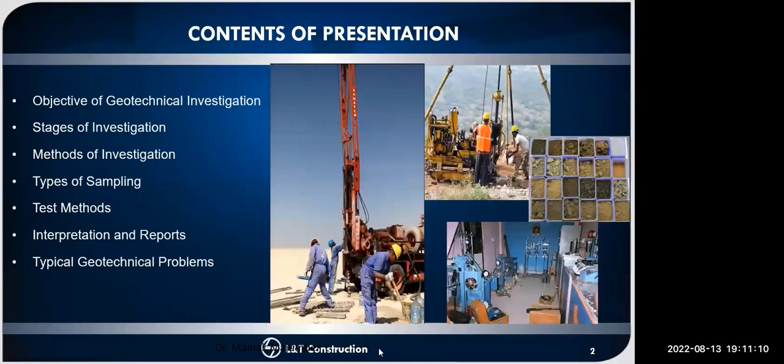I hope my screen is visible. Can anybody give me confirmation whether my screen is visible or not? It's visible, sir. Okay, are the slides moving? No, sir. Now? No. Now it is? Yeah, is it moving? Yes, sir. Okay, thank you.

So the objectives of basic geotechnical investigations and different stages of this investigation: method of investigations, types of sampling, test methods, interpretation and reports, and typical geotechnical problems.

These are most of the challenges we will face when we go for bridge construction initially. As a geotechnical engineer, you need to have some idea before going for the geotechnical investigation. We will discuss these major aspects today, the importance of these challenges, the different critical aspects, and what we need to think about before starting the investigation.

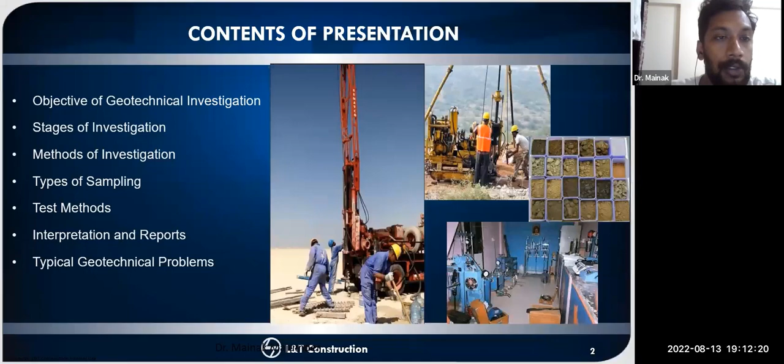That tilt of this tower - it's a very iconic tower, and there has been a lot of investigation on this tower, because this was the ideal case of poor geotechnical investigation, the initial geotechnical investigation. I hope all of you who have read about the historical importance of geotechnical investigation have gone through this Leaning Tower of Pisa case study.

Basically, the first part of this investigation process is to ensure safety. As a designer or geotech engineer, our main job is to provide safety, safe construction, as well as economical construction. So safety and economy - these two are very important.

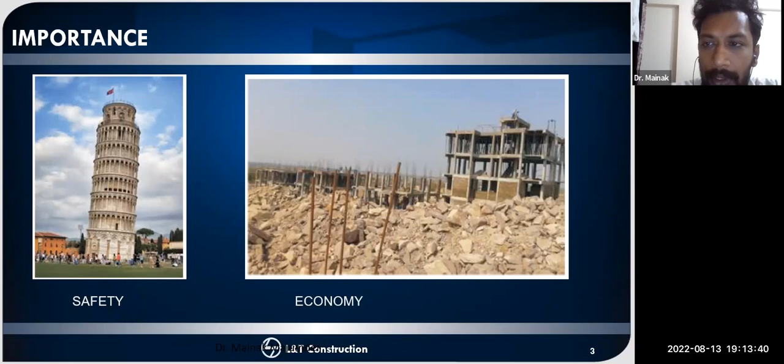For one geotechnical investigation report, suppose for one borehole, we need to go at least 25 to 30 meters deep, either SPT or CPT, then find out the different layer-by-layer properties. These things are also quite costly, so we need to be very wise about selecting boreholes and think about the soil properties along the layers, along the depth of the soil.

So the different objectives can be classified as suitability, design, and existing works - this is another important aspect.

Of course, if there is no construction or other structures present, we generally call it a green field. But if other structures are present, we need to consider the existing work, existing structural aspects, and any interaction effects or effects of changes, and the choice of the site - basically site location where geology and geography are also involved. So it's a very challenging part to select the site, and the methodology of course will also involve the economy as well as time saving.

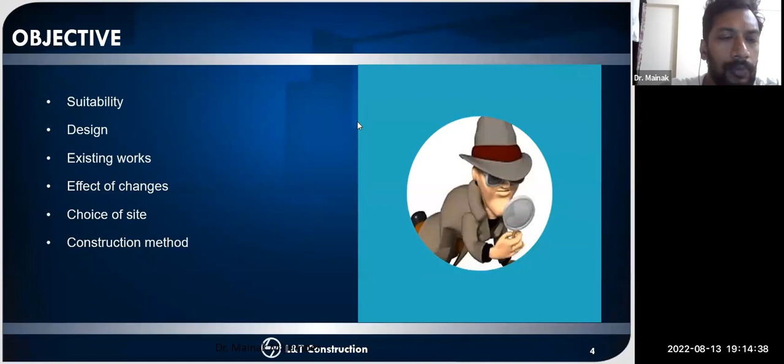Different stages of investigation, like the initial preliminary investigation, which we call the reconnaissance, is an important and interesting part for the surveyor. The whole surveying study involves the desk study and the site reconnaissance.

Initial preliminary investigation uses site data and past data. Many times we check Google Earth data to see what types of soil stratum are present, the location of the water table, soil types and conditions, and whether the area has heavy rainfall or is very dry. Those parts are stage 1.

Stage 2 is the detailed investigation for the design, where we need to design either by manual calculation or using software, inputting certain parameters. Stage 3 will be the construction review.

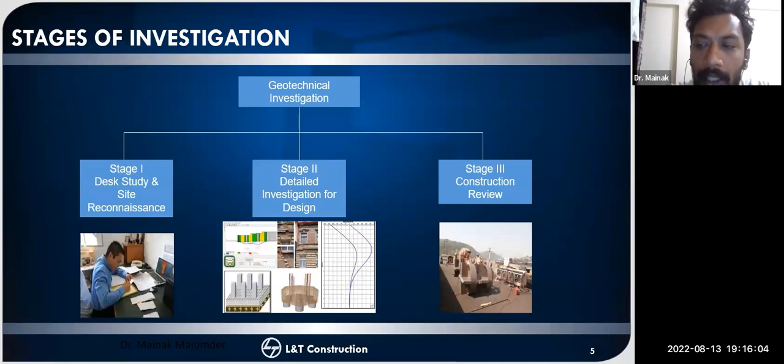Another component here is plants and machinery. Based on this investigation, we consider the different plants and machinery involved for this construction, as part of the overall construction review.

So first stage: the desk study and the reconnaissance, as I mentioned, involves maps and survey plans. It's important to understand current maps and location, the geographical and topographical stratum, rainfall parameters like annual rainfall data, and groundwater table information. Those things are important from the survey plans.

Permitted use, regulation and permission is one important aspect. If bridges are happening through congested places or urban areas, there must be underground constructions or underground utility lines, called underground utility services. We need to find out whether it's permissible or whether we need permission from the respective authority. Another is approach and access.

Approach roads or access roads are very important because we need to provide construction for the construction activities and mobilization of machineries. We should provide that approach and access road, otherwise it will cause time delays from an operational point of view. We need to think about that part.

Next is ground conditions, which is very important from photographs and images. Nowadays there's a lot of advancement, like use of drone survey and LiDAR survey, to get more photographs and more detailed three-dimensional information about the site location, including underground structures and utilities.

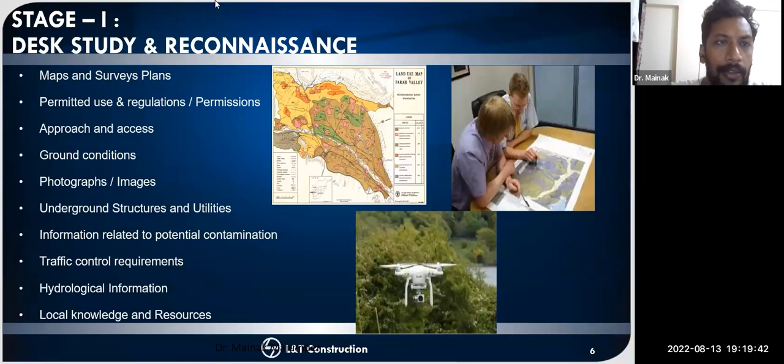Next, what is the outcome of stage 1? As I mentioned, there are 3 stages. The first stage is to find the location and extent, like the depth of investigation or spacing of investigation. Location and depth of boreholes are decided based on expected subsurface conditions, previous geotechnical information available, the likely extent of zones in ground influenced by loading, the need to achieve a reliable geotechnical model analysis, the size and importance of the structure, and tender and contractual requirements.

Each of these points has different importance — for example, tender and contractual requirements. Suppose from the contractor side, some clients gave certain criteria, such as that access roads or construction roads need to be delivered in terms of some maintenance gallery, or from an urbanization point of view, we need to plant more trees.

Nowadays it's mandatory that from each construction site, we need to plant more trees to reduce the carbon dioxide emission. For example, size and importance of the structure—what are the structures, like box culvert, pier, abutment—and what will be the size? These things come as the outcome of the desk study and the reconnaissance survey.

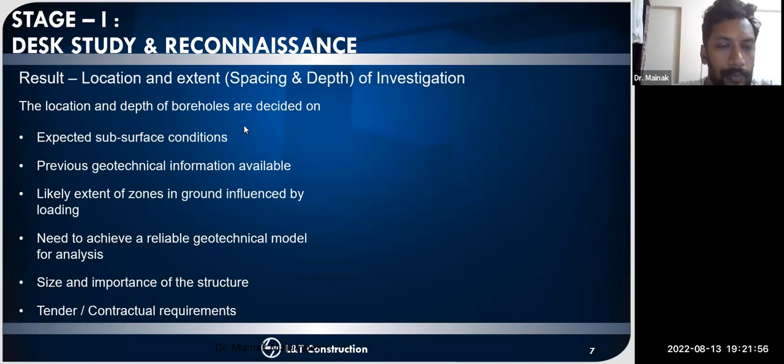From that point of view, you can understand that this depth of exploration is a very important part. One will be the cutting depths, like how we are going to cut, available machinery, and the depth we are going for the construction, that is excavation.

Second is the contaminated ground. This is very important. Suppose in some patches organic soils are present, some peat or organic soil, or more chlorinated or sulfate-prone soil, sulfate attack prone soil present, then we need to consider that contamination effect also. Size and importance of the structures, extent of influence, foundation type, embankment heights, expected subsurface conditions—all these aspects we need to consider before going for the depth of exploration.

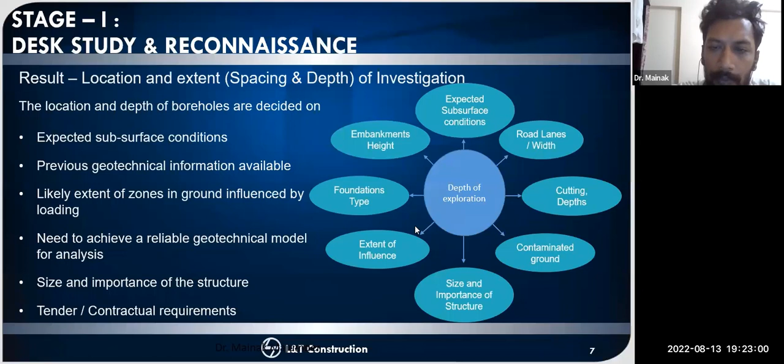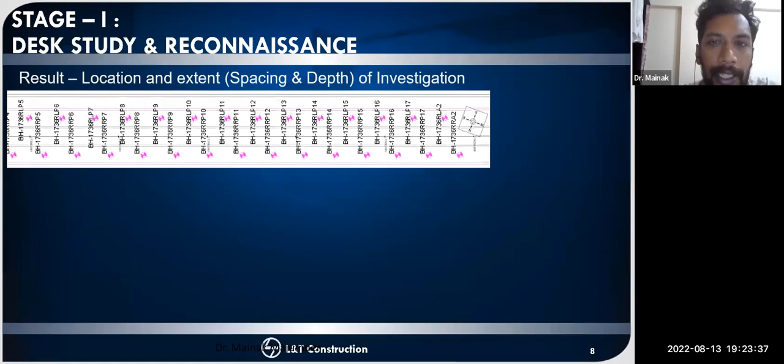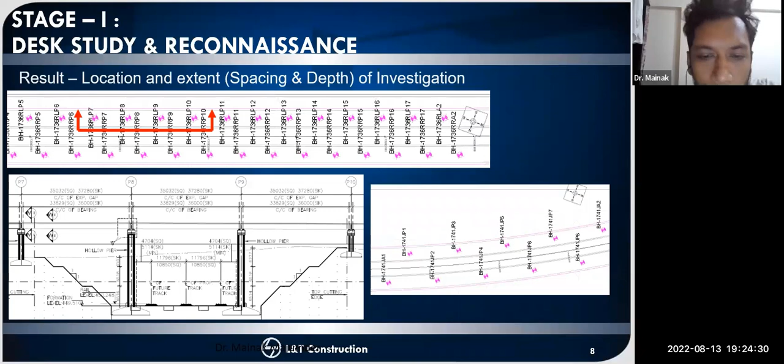These are the different aspects of borehole location and borehole spacing. So spacing and depth of investigation is very important to find out from stage one of the investigation. For depth of investigation and exploration, there are some thumb rules or guidelines.

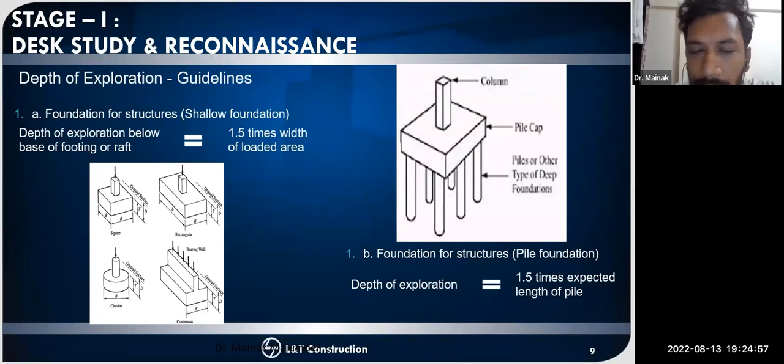For example, for a shallow foundation or structure, depth of exploration below the base of the footing or raft is equal to 1.5 times the width of the loaded area. This is very common. And for a structure like pile foundation or deep foundation, we consider 1.5 times the expected length of the pile. For example, if the length is 25 meters, we need to consider exploration up to about 40 meters, since that will be the influence zone or loaded region.

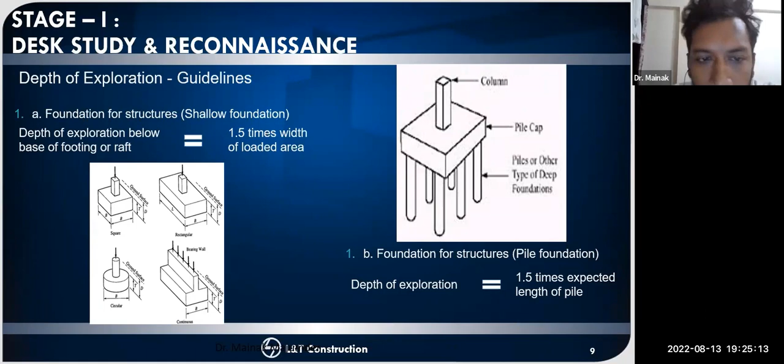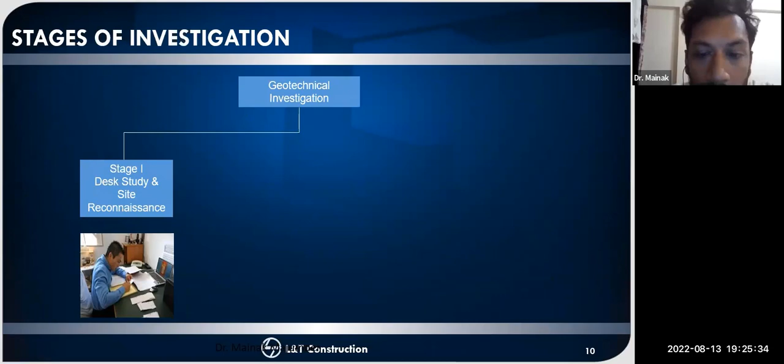So that is stage one—I hope all of you understand stage one and its different aspects. It needs to be done very carefully, considering all the above mentioned things. You can note down what are the important aspects and thumb rules of this desk study and site reconnaissance.

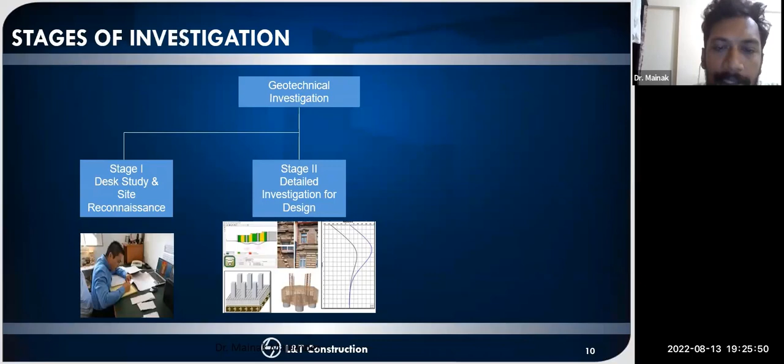Stage two is the detailed investigation for the design. From stage two, we'll get the information about the input parameters for the design and analysis. So what are the different methods to carry out ground investigation?

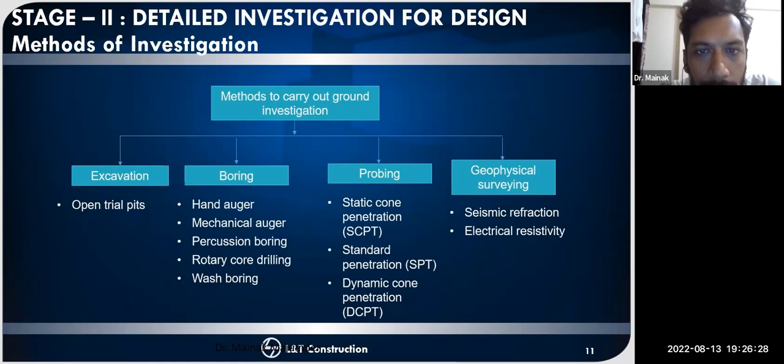One is excavation, meaning open trial pits. Second is boring—there may be different kinds of boring, like hand auger, mechanical auger, percussion boring, rotary or core bore drilling, wash boring. Third is probing—static cone penetration (SCPT), standard penetration (SPT), dynamic cone penetration (DCPT), and geophysical surveying, like seismic refraction and electrical resistivity. So these are the different ways to carry out ground investigation.

So excavation, like I mentioned, open trial pit. It's like standard dimension of the open trial pit, and pits are dug by hand or by excavating equipment, by hammering. So disturbed or undisturbed samples can be taken out from the pits. Pits are basically used, in technical terms, to find out the representative sample.

To find out the representative sample, pits are very easy to find out the representative samples from the pit. And these are a kind of sampling. So from this point of view, we will get the sample of the standard dimension, which may be disturbed or undisturbed.

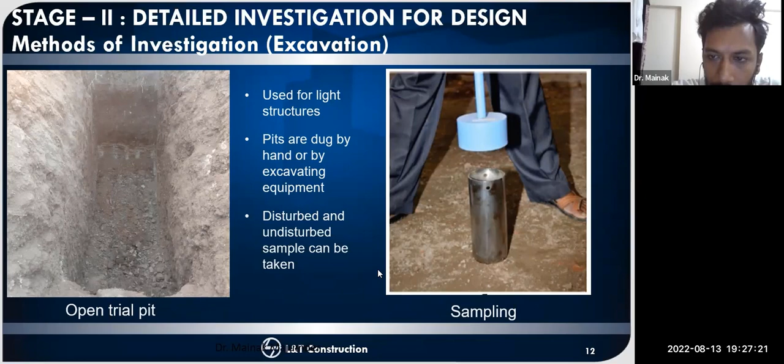So hydraulic rotary drilling rig - these are different equipment. So coming to that, investigation is not only about proposing depth or proposing spacing. We need to think about the instrumentation and plants and machinery, which we call in short P&M.

So hydraulic rotary drilling rig is used to do boring by cutting action of a rotating bit. Here we have high torque and less vibration. Second one is the calyx rotary drilling rig, boring by cutting action of rotating bit, easy to shift. The third one is percussion boring, breaking of the ground by repetitive blows from a bit or chisel.

This is especially advantageous when we encounter boulders or gravelly strata, breaking the ground by repeated hammering action. The hammer energy can be controlled from the free fall height of the loaded hammer. So these are different methods of investigation for boring.

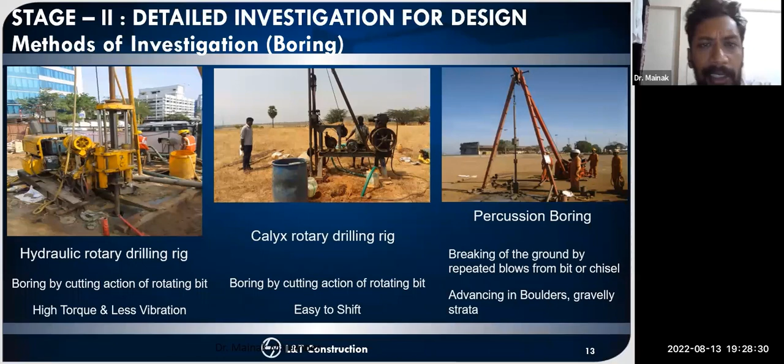And probing, as I mentioned, is very commonly used - the standard penetration test. I hope all of you are familiar with this standard penetration test specification, which uses the split spoon sampler. A 750 millimeter guiding rod falls down, with a 63.5 kg donut hammer, manila rope, tripod, ladder, and pulleys - all different components of the SPT.

So why are SPTs commonly chosen? Because it has low cost, no instrumentation involved, availability of various correlations, and both representative disturbed and undisturbed samples can be collected.

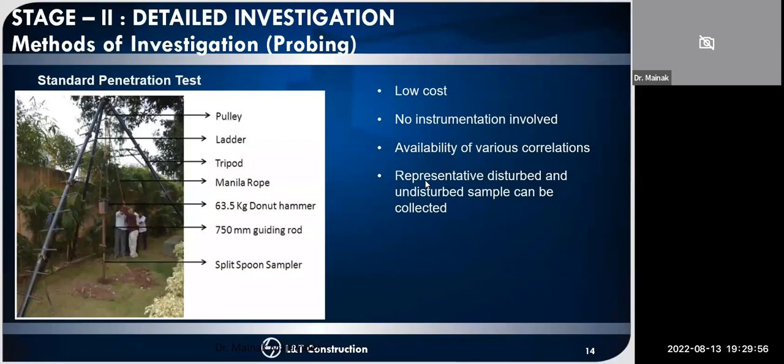So after probing, as a result of the standard penetration test, we get correlations for different parameters based on the number of blows given to the sample. It's generally well established that very soft soil has 0 to 2 blows, soft soil has 3 to 4, and hard soil means above 32 blows.

For clay, as for sand based on relative density - if it is very dense sand, it will be more than 50 blows, and if it is dense, 31 to 50 blows. So the number of blows will give you some idea about what type of soil is present under the ground.

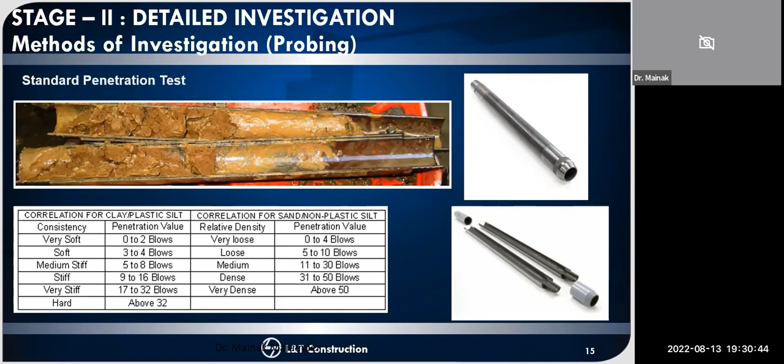So the standard penetration test - this is the basic philosophy of the standard penetration test, a kind of free fall, considering half MV squared equals... V equals the square root of 2GH. So basically we are converting the weight of the hammer times the height of free fall.

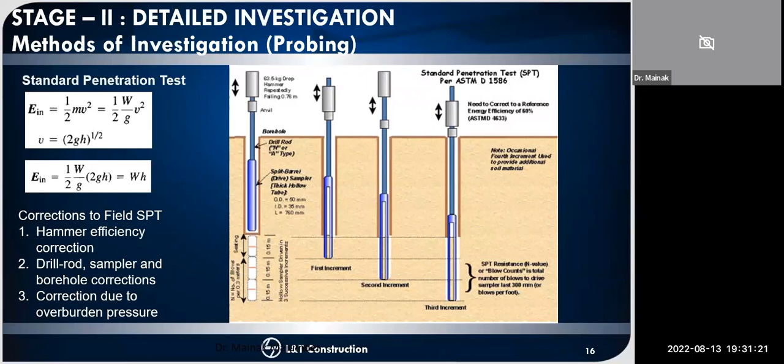So corrections to field SPT - we need to know very carefully the different corrections for the SPT. These include hammer efficiency correction, drill rod and sampler correction, borehole correction, correction due to overburden pressure, and correction due to water table.

Those are very important to know as a technical skill to find better correlation based parameters. So from the standard penetration test or number of blows, we can estimate the available bearing capacity, available safe bearing capacity, and test based correlations will give values about C and phi, and density. This will be input into the design tool you are using, and those input parameters will be found from this detailed investigation report, or stage 2.

So SCPT, or static cone penetration test - these are very important.

Determine the in situ penetrative resistance of clay. For clay, it is very commonly adopted because of the sticky nature. Sometimes the standard penetration test is not suitable. So basically, the cone is pushed into the ground at the rate of 10 to 20 millimeter per second, but it's not suitable for dense sand.

There can be pore water pressure measurement. Suppose there is some fine sand or loose sand as well as soft clay present, there may be high chances of liquefaction, so we need to measure the pore water pressure. So a piezo cone or piezoelectric device can be added, which will ultimately give you the SCPT and pore water pressure. So this is one of the versatile tests.

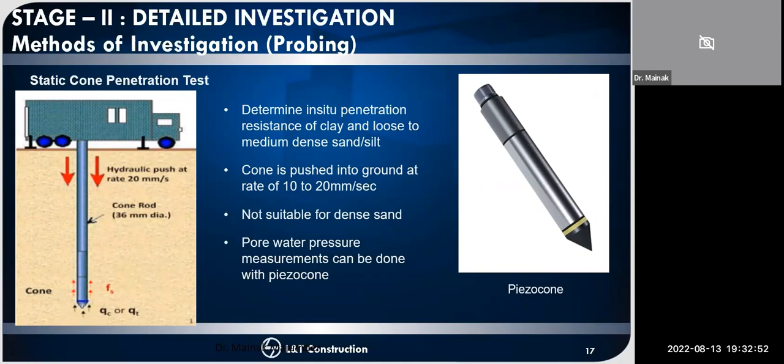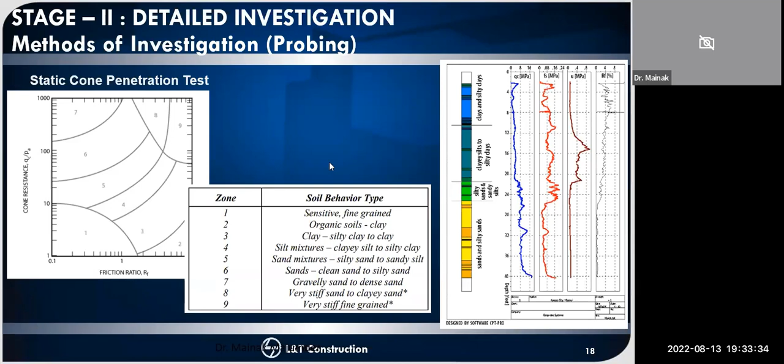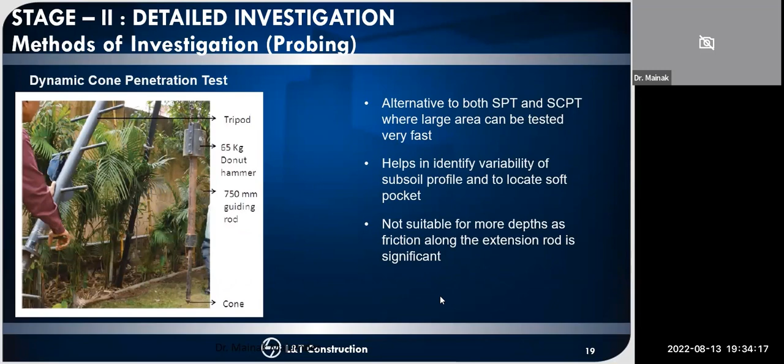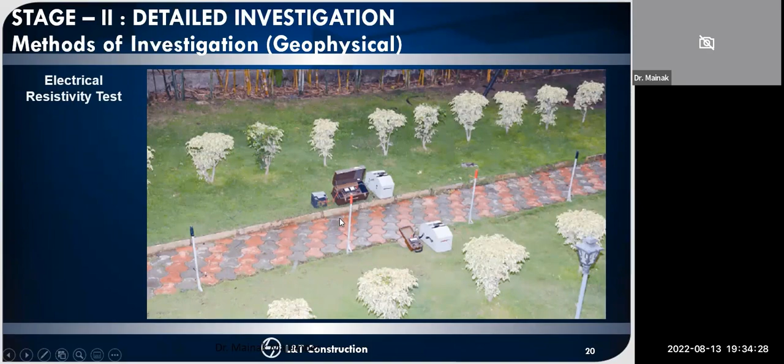Another thing is about the geophysical test, or electrical resistivity test. We are ultimately finding that each type of soil has a different resistivity. Based on the potentiometer, battery, and milliammeter, we try to find out the resistivity of the soil. The mean resistivity comes in terms of ohm-centimeter.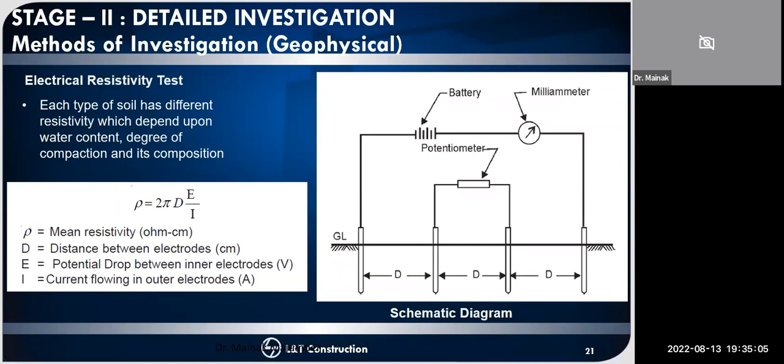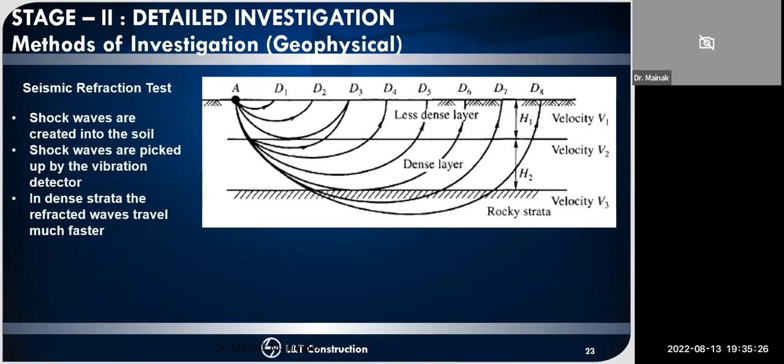Seismic refraction test is another geophysical test. In this test, shock waves are created into the soil and picked up by a vibration detector. In dense strata, the refracted waves travel much faster, and based on that we get the refraction index value. So this gives us some idea about the geophysical test.

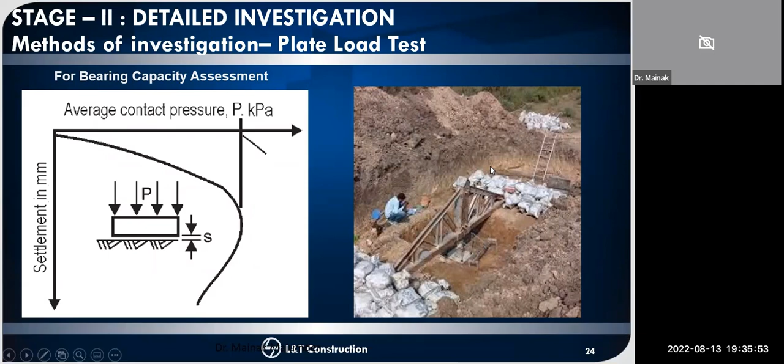Plate load test is another test for bearing capacity assessment. Initial bearing capacity assessment is done using the plate load test. The average contact pressure and settlement curve will give you the idea about the bearing capacity. This is a very important test, as in many cases like foundation design, we need to do bearing capacity assessment from the plate load test.

Now coming to the types of samples. As I mentioned, there are disturbed and undisturbed samples. In disturbed samples, moisture is not retained since it is already disturbed from its in situ stage. For more accurate data, we need undisturbed samples, since in situ stress conditions are preserved in the undisturbed samples.

Core samples and block samples are also important, and it's important to find out the different importance of block or core samples. Core samples are important to find larger depth variation and different variation of properties.

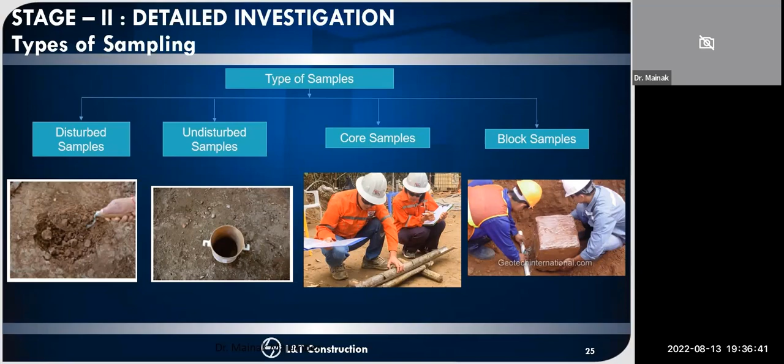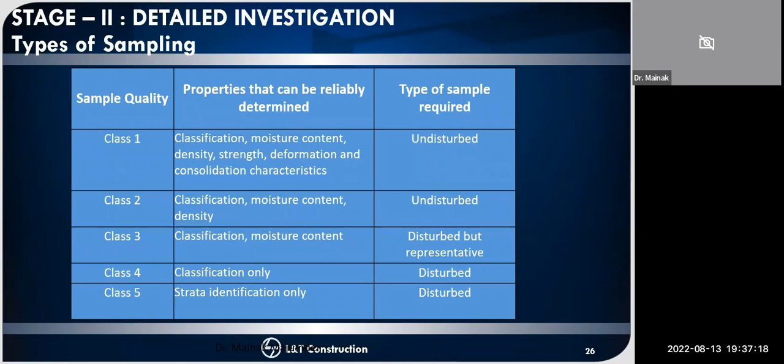For types of sampling, properties that can be reliably determined are considered Class 1, such as classification, moisture content, density, strength, deformation, and consolidation characteristics, where undisturbed samples are preferred. Class 2 is classification, moisture content, density, where undisturbed samples are preferred. Class 4 is only classification, using disturbed samples. So a disturbed sample will only give you classification and strata identification, but if we need to find the swelling index or consolidation parameters, we need to use undisturbed samples.

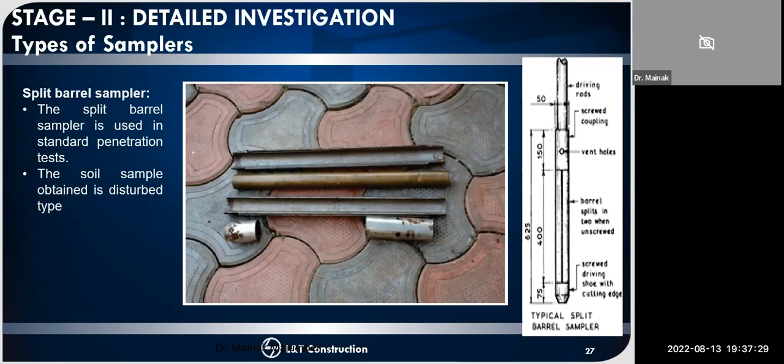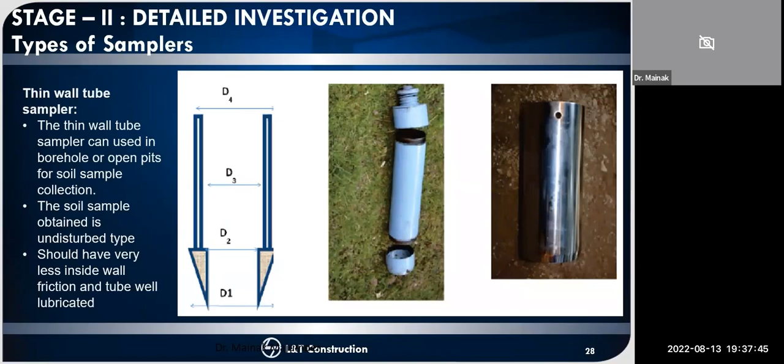Types of samplers: split barrel samplers are very common for the SPT test, and the soil sample obtained is very disturbed type. Tube samplers, like thin wall tube samplers, give you undisturbed type samples, and should have very less inside wall friction with the tube well lubricated.

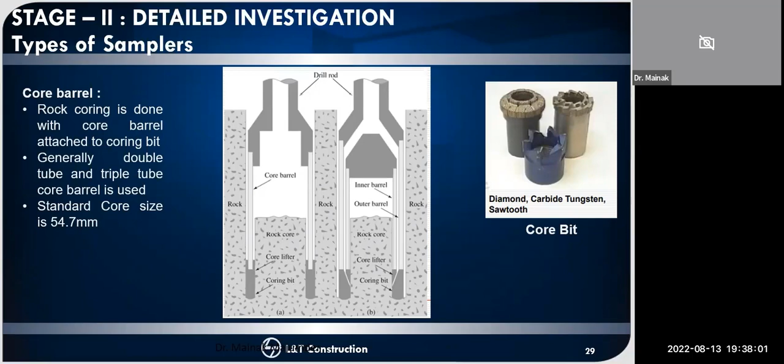Core barrel: rock coring is done with a core barrel attached to a coring bit, generally a double tube, and triple tube core barrel is used, with standard core size of 54.7 millimeter. So this is the core barrel, like the triple core barrel assembly and overshot, the whole core barrel assembly. Triple tube core barrel is good for obtaining core samples.

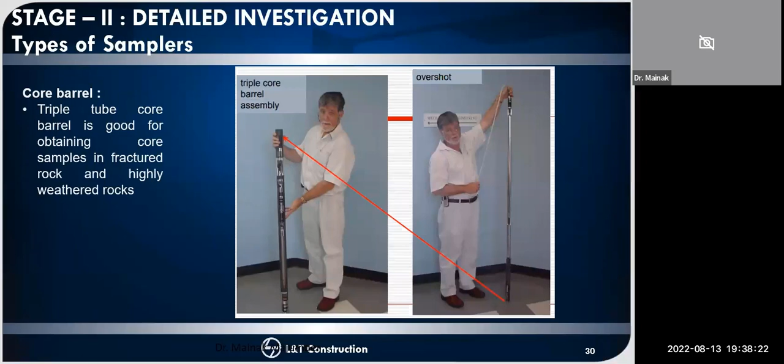In fractured rock and highly weathered rocks, these undisturbed samples, core box and core samples are very important to identify about this core barrel.

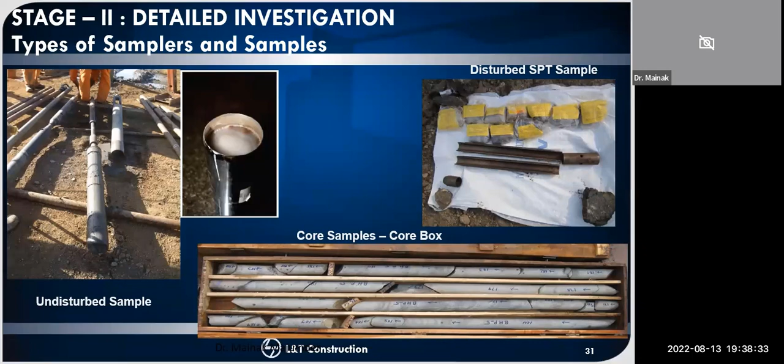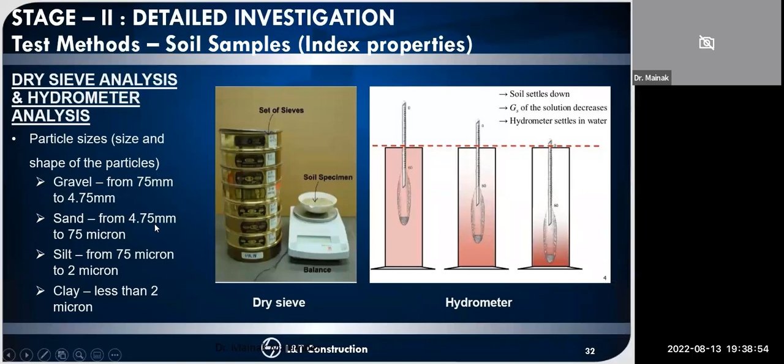So find out the index properties. This is a very basic idea about the index properties. We need to find out the particle size gradation, defined through sieve analysis and hydrometer analysis, and this will give you the idea about the different size of the particle.

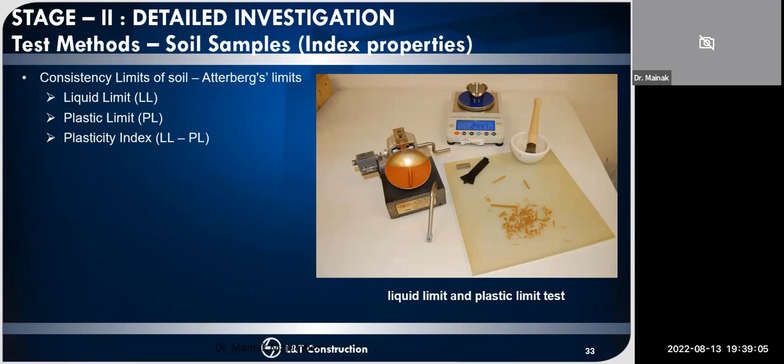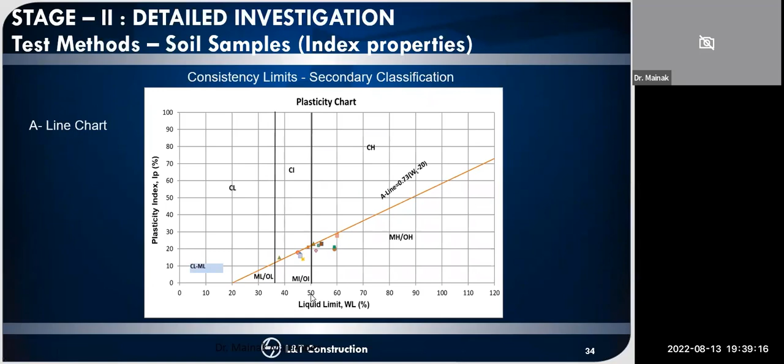And consistency limits like liquid limit, plastic limit, plasticity index, the Atterberg limits will have different test methods, the liquid limit and plastic limit test. Ultimately, these consistency limits will give you the A-line chart to find out the name of this different symbolic classification of the soil sample.

Particle sizes will give you the idea about the different soil descriptions. And shear strength of the soil will be found mostly from the direct shear test, very common for the sand.

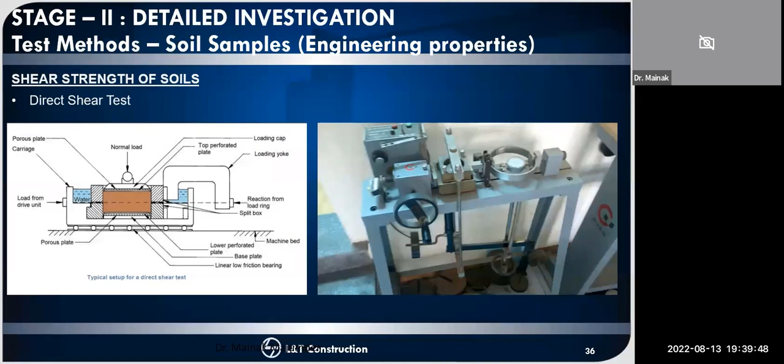To find out the shear strength parameter of the soil, unconfined compressive tests are very quick tests recommended for the cohesive soil.

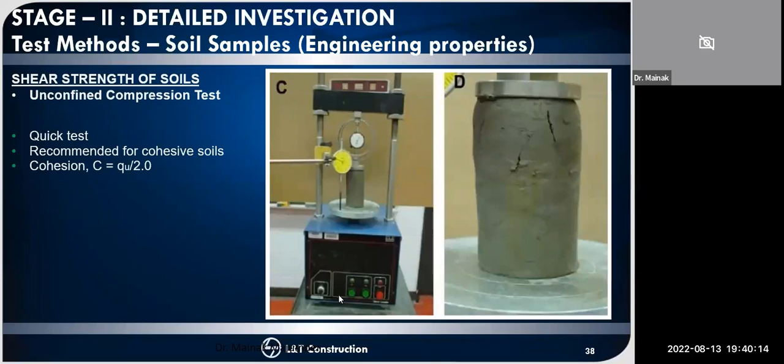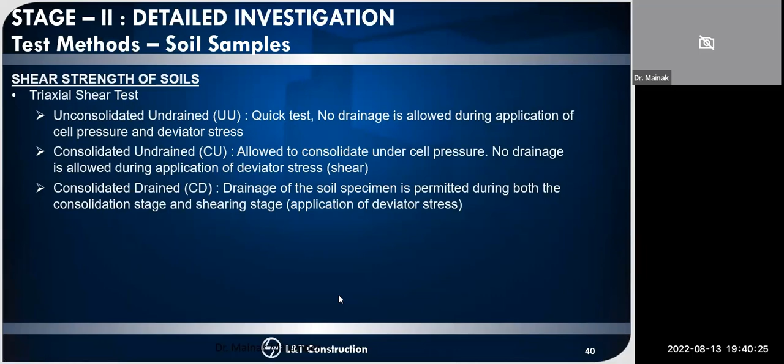This will give you the idea about the different in situ stress conditions. So we need to consider this thing to replicate the in situ stress values.

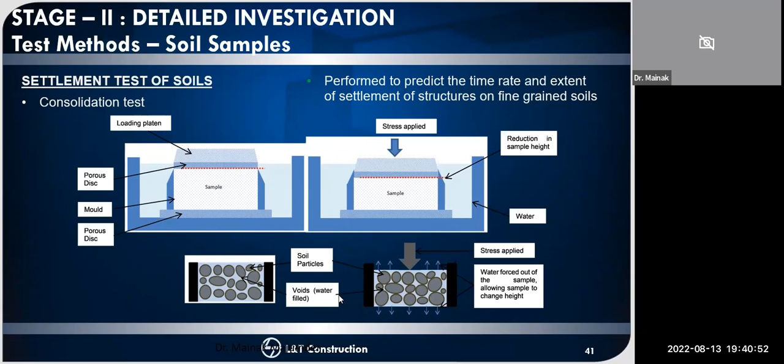So settlement of the soil, these consolidation tests are more preferred tests to find out the settlement of the soil. Loading platen, I hope all of you are habituated to this settlement behavior, like the stress applied, and how this settlement consolidation naturally occurs with application of water and application of stress. It will have that consolidation process which will ultimately settle, and we calculate the settlement curve from the E log P curve, which will give you the settlement value.

So now these are kind of all our common tests we have already discussed. Now these are kind of special tests.

Chemical tests of the soils and the groundwater samples. pH is one of the tests, sulfate, SO3 and SO4 content, chloride content, organic matters - concrete and reinforcement may get attacked by chemicals present in soil and groundwater.

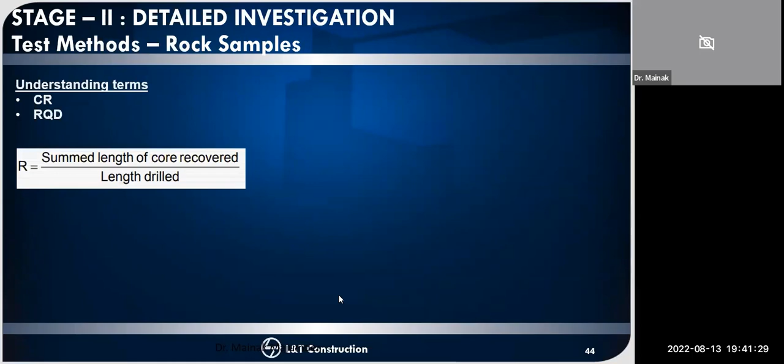Understanding the terms CR and RQD. The CR is the sum length of the core recovered divided by length drilled, so this is the core recovery value. Core recovery value will give you the idea about the rock sample, different rock values, like slightly weathered, moderately weathered, highly weathered. This will give you an idea about the rock samples.

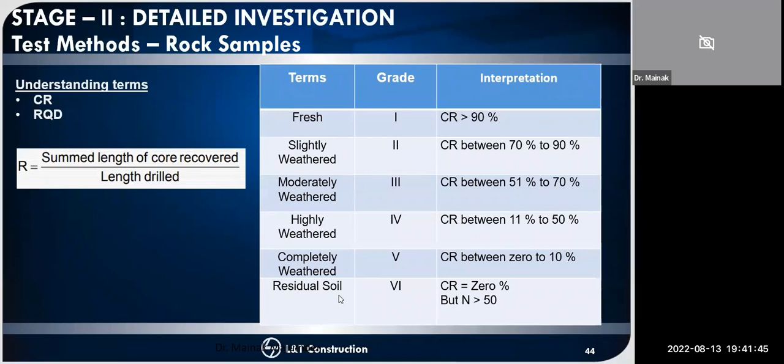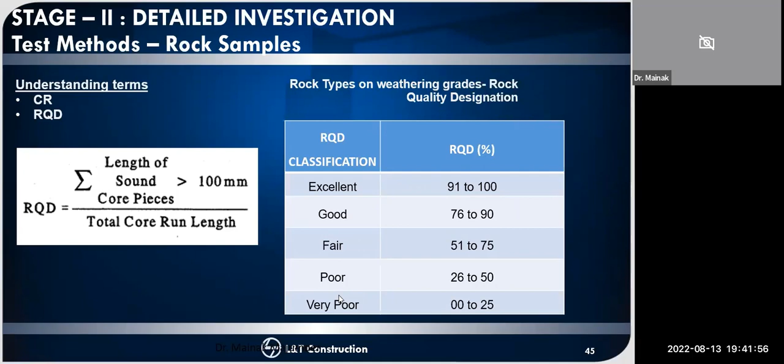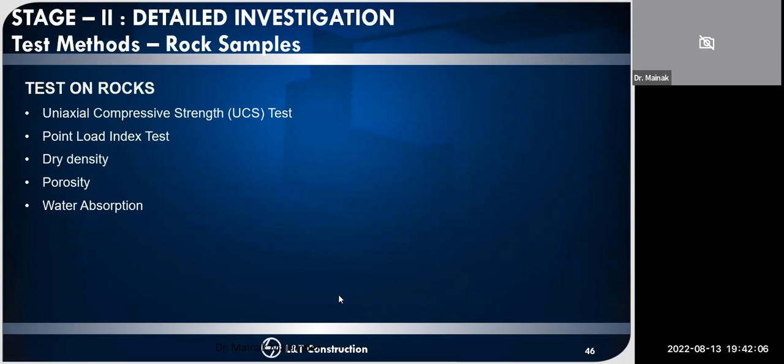And RQD value will give you the classification of the type of weathering grades, whether it is excellent, good, fair, poor, very poor. Tests on the rocks are uniaxial compressive strength, point load index test, dry density, porosity, water absorption. For the rock sample, there are different tests like unconfined compression test apparatus, point load index, UCS test. These are different tests on the rocks, and then interpretation and the report.

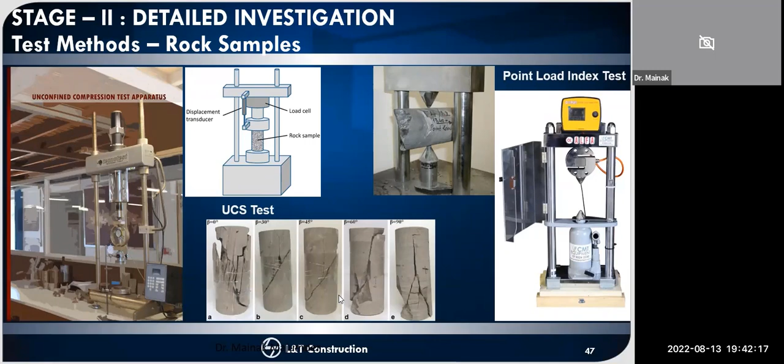Now these are all tests. Since we cannot jump directly to the report, I gave the overview of the tests.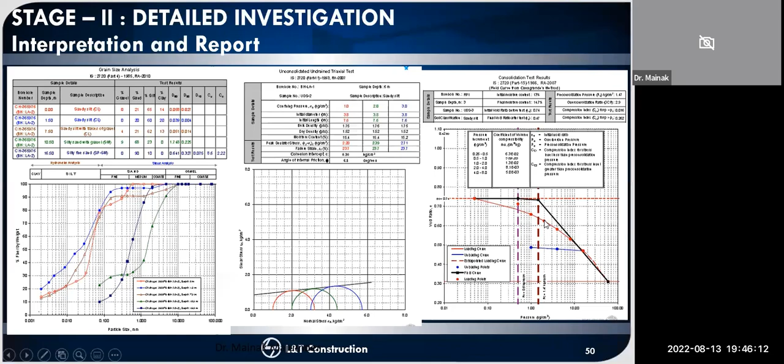So from the consolidation test we'll have that e-log P curve, mostly by using Casagrande's method. We will find out the PC value, and from the PC value we'll find out the settlement value. From the pre-consolidation pressure value we'll find out the CC and CCS, and ultimately we will find out the settlement.

So this kind of profiling, if in many companies you have the initial days or initial need to get habituated with the design, you have to understand how to do profiling or layering. There are many softwares available, and many people do it in Excel also, but it's very important to do this soil borehole profiling. This is the borehole profile.

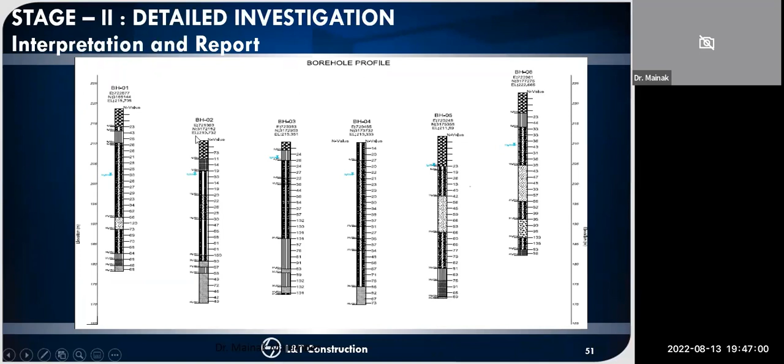So define the borehole profile with different depths. This will be the depth, elevation depth part, both scales will be the vertical scale, and the different layers, layer-wise, with the proper soil classification symbol and the N value we have to provide. So here you can see northing, easting, and the EL level also, as we have provided.

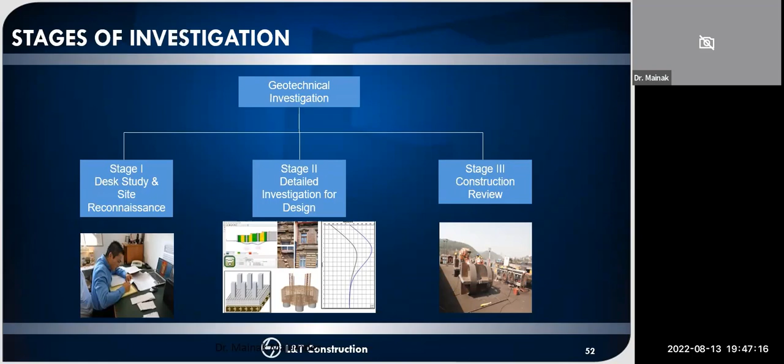So this is about stage 3. Stage 3 is the last step, and this is construction review. So as of now we have discussed stage 2, the detailed investigation report and what this report will consist of. Now stage 3 will be the construction review, that during actual construction following typical problems, how to find out the founding level, founding strata.

For example, soil condition mismatch. For example, groundwater table conditions, there will be fluctuation. So difference in the ground levels and the founding levels, non-availability of enough ROW, differences in the topography. So variation in structure, size, type, location after geotechnical investigation and design. Changes due to other aspects such as hydrology, client requirement, which we call change of scope, COS. So this we need to understand from the geotechnical problems.

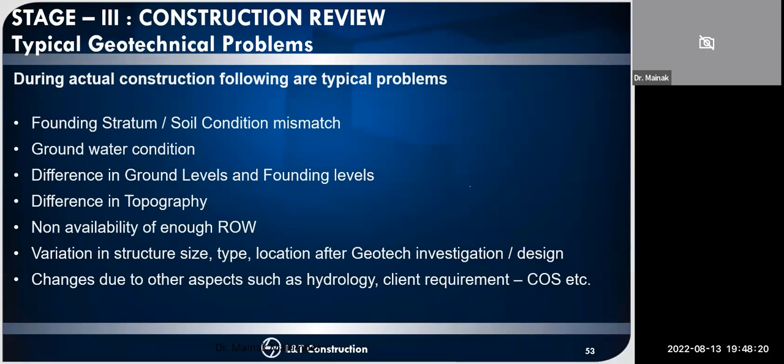So during actual construction, following are typical problems. We have faced these in many ways, and that's why we have some ideas. There may be some other particular site-specific problems also. So this is the kind of content I need to deliver today, and these are different soil scenarios based on site conditions. These geotechnical investigations we need to consider.